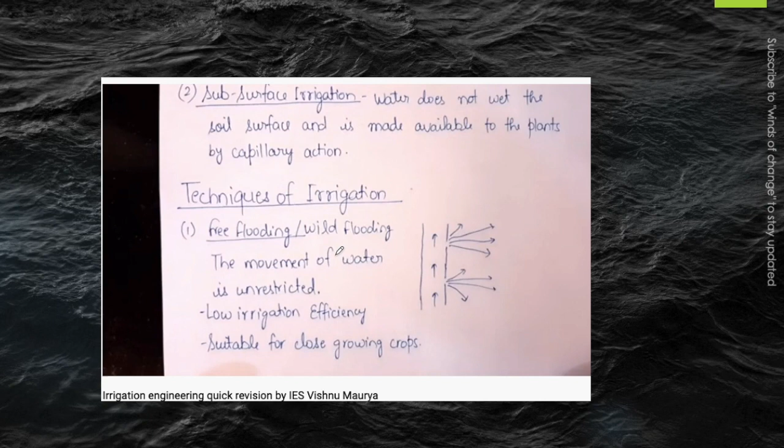We have explained the free flooding as wild flooding. The movement of water is unrestricted in this one, while in check flooding, water is controlled by surrounding the area with low and flat levees, and in furrow irrigation, only 20 to 50% of land surface is wetted by the water.

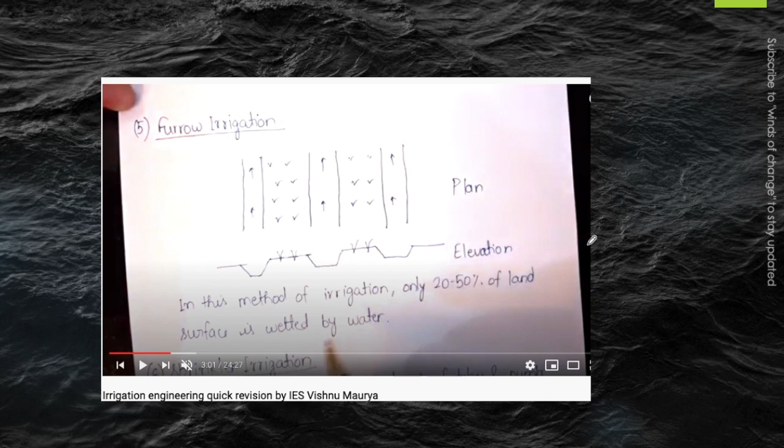Next question. Regime condition in a channel may occur if discharge is constant, channel flows uniformly in incoherent alluvium as that transported in suspension, or silt grade and silt charge are constant, or all of the above. Just think about the regime condition. Can you recall it?

Next question. Irrigation canals are generally aligned along ridge line, contour line, valley line, or straight line. What will be the answer here?

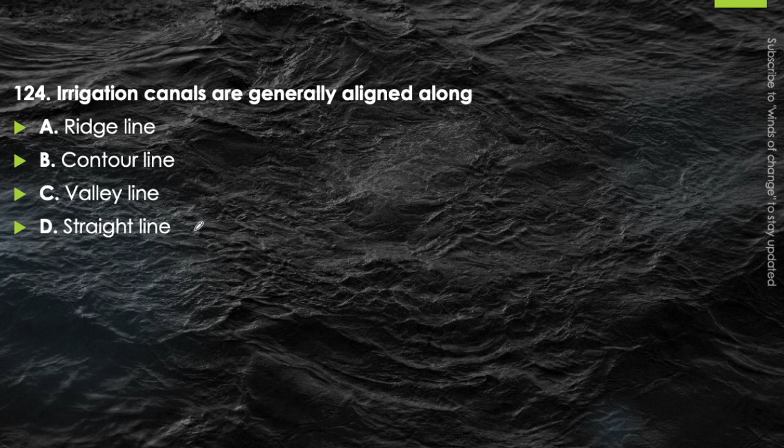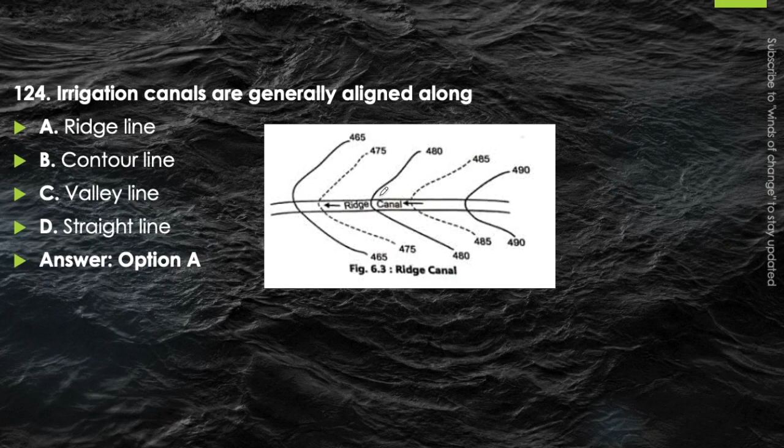Usually the irrigation canals are laid along the ridge line of that area, so that the water from this canal can be provided to the area of influence which are at the lower elevation in its surrounding. Okay.

Next question. Seepage through the foundation in an earthen dam is controlled by providing rock toe, horizontal blanket, impervious cutoff or chimney drain. Just think about it. Through the foundation in an earthen dam, if we have to control the seepage, then what we will provide? Obviously, it has to be an impervious layer which can only prevent the seepage of water. So answer will be option C, that is impervious cutoff has to be provided.

You can watch it here. These are the impervious cutoff. Cutoff trench is being provided below the earthen dam to prevent the seepage of the water.

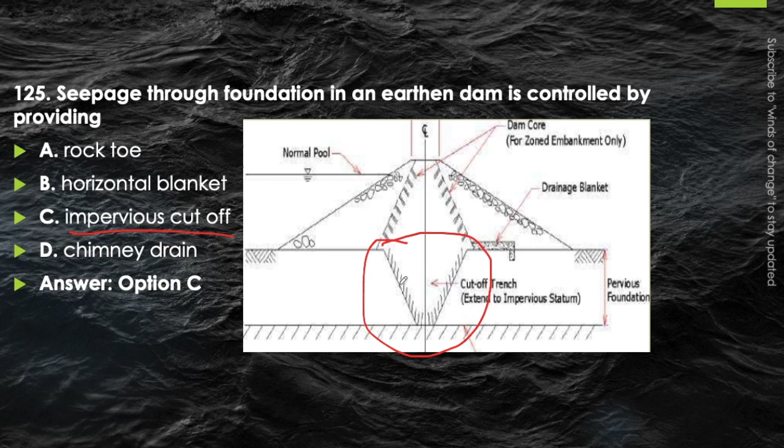Okay. Next question. If the straight side of a triangular section of a lined canal with circular bottom of radius d makes an angle 45 degree to the horizontal, the hydraulic mean depth is d, d by 2, d by 3 or d by 5. Just think about it. Can you recall the formula for this hydraulic mean depth, that is A by P, and formula for A and P in case of triangular section of canal? It will be option B, that is d by 2.

How it is so? Actually, it is irrigation canal having triangular side and circular bottom, and for such canal, area is given by d squared (theta plus cot theta), and perimeter, that is wetted perimeter, is given by 2d (theta plus cot theta). So A by P ratio, that is R, will become d by 2. So the answer will be option B, that is d by 2. Okay, we have to memorize this formula. This is also important for area and perimeter in case of the triangular lined section with circular bottom.

Next question. The water stored in the reservoir below the minimum pool level is called useful storage, dead storage, valley storage or surcharge storage. Just think about it. We have already discussed this question in the previous video of this 160 questions. Below the minimum pool level, that is called as dead storage. That is option B will be the correct answer.

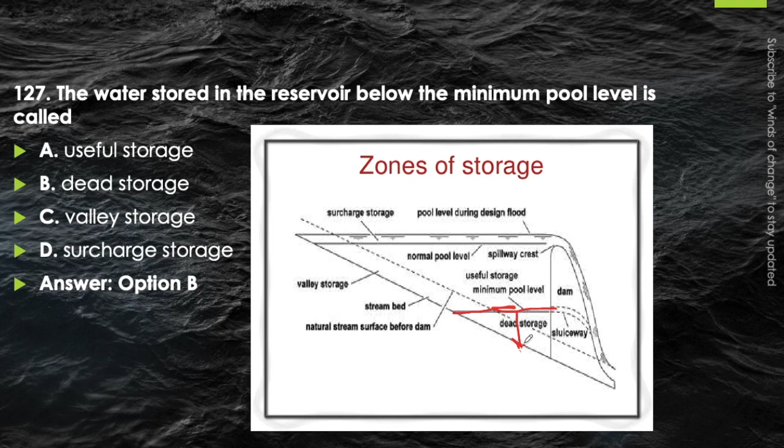Next question. The most suitable chemical which can be applied to the water surface for reducing evaporation is methyl alcohol, ethyl alcohol, cetyl alcohol or butyl alcohol. Just think about it. This is an important question. The answer will be option C, that is cetyl alcohol is the chemical that can be applied to the water surface to reduce the evaporation losses.

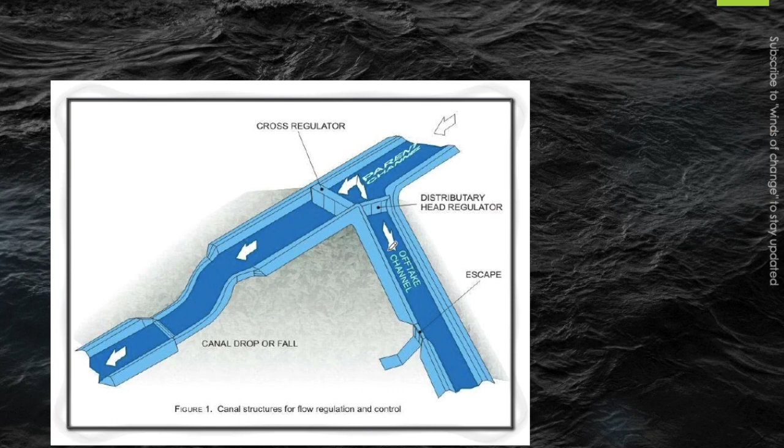Okay, so this is the statement which was written in the question, that is to increase the water head upstream when the main canal is running with low supplies. Okay, next question. If the reduced level of the canal bed level and highest flood level of the drainage are 212 meter and 210 meter respectively, then the cross drainage work will be aqueduct, superpassage, siphon, or siphon aqueduct.

Very easy question. You just have to know what are these things. As we already know, all of these are explained in the revision video of irrigation engineering, so you can watch there. And in this question we have to find out what will be the answer. Since RL of canal bed level is 212 meter and HFL of drainage is 210 meter, now canal bed level is above the HFL of the drainage.

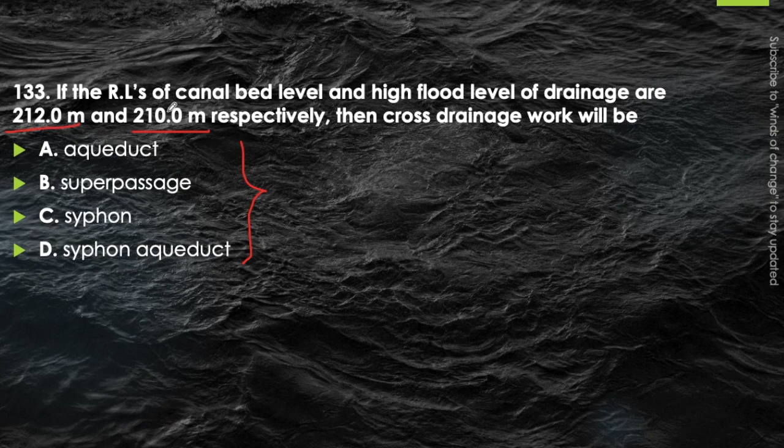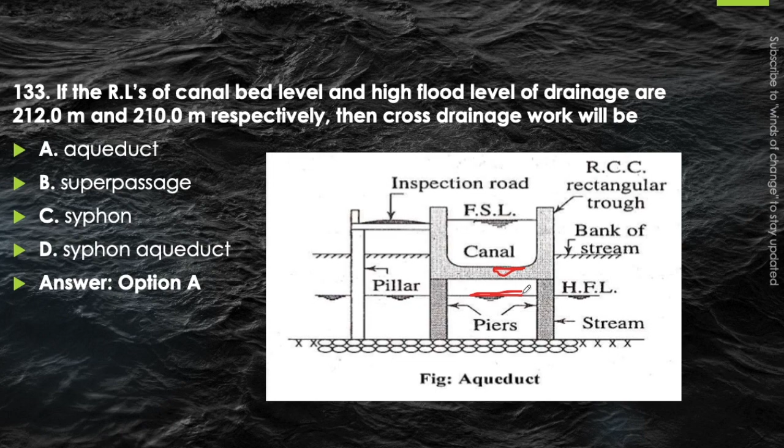So this is the case in which canal is above the drainage and HFL of the drainage is below the bed level of the canal. So what will be the condition here? It will be a condition of aqueduct. Okay, in which this is the canal bed level. So its level is 212 meter and the HFL of this drainage, that is 210 meter. Okay, so that is why it is aqueduct.

Next question. Effective precipitation for a crop may be defined as total precipitation minus loss due to evaporation, total precipitation minus loss due to infiltration, total precipitation during the crop period, or available water stored in soil within root zone of the crop. Just think about the answer.

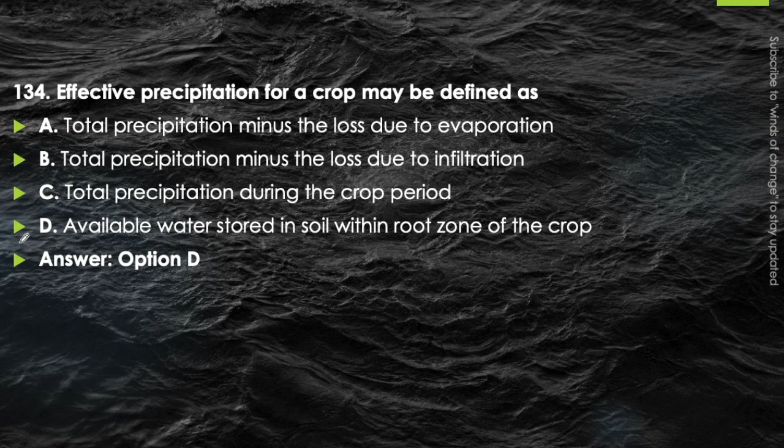It is the available water stored in soil within root zone of the crop, which will be the effective precipitation, because in the effective precipitation we minus all the losses that occur, and after that whatever precipitation is stored, that can be obtained by the root of the plant, that will be the effective precipitation, that will be the available water stored in soil within root zone of the crop.

Okay, next question. A deficit of the sediments in flowing water may cause a river meandering type, aggrading type, degrading type, or subcritical type. It is being said that deficit of sediment means it is being deprived of sediment in the flowing water. Then which one will be the answer? Just think about it. It will be a case of degrading type river, okay, in which the sediment load is decreasing. If the sediment is being deposited, then it will be called as aggrading type. Okay, so it is a degrading type river in which the deficit of sediment occurs.

Next question. The water utilizable by plants is available in soil mainly in the form of gravity water, capillary water, I think it should be hygroscopic water, or chemical water. Just think about it. Water utilizable by the plant is available in the soil in the form of capillary water. Okay, it will be available in the form of the capillary water.

Gravity water will seep down and join the water table. Hygroscopic water is the one which is available inside the soil particles, so that cannot be utilized by the plants. While the chemical water can also not be utilized by plant, it can be the capillary water only.

Which can be utilized by the plants. Okay, next question. Which of the following methods of applying water may be used on rolling land? Since we are having a rolling land, it is not a plain terrain, so which method will be applicable? Border flooding, check flooding, furrow flooding, or free flooding? Think about it. In this one, the answer will be free flooding.

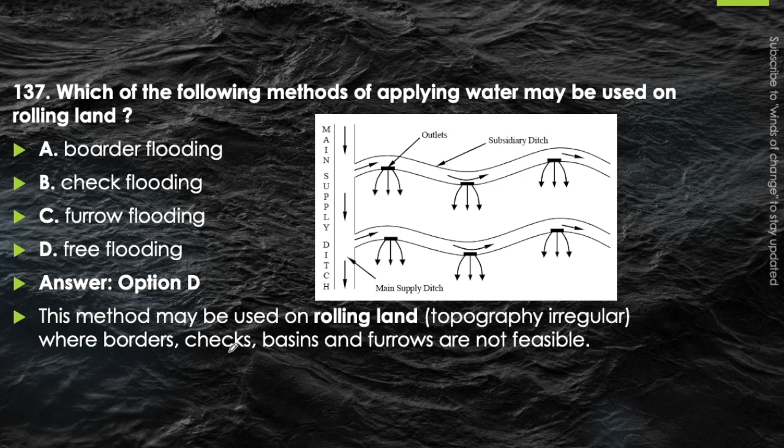Free flooding will be applicable on the rolling terrain. Since the elevation of different parts of the terrain is not defined, it is a rolling terrain, so obviously we will prefer free flooding only. We cannot go for any other type of flooding. We can also go for the sprinkler method, but it is not given in the options, so obviously the answer will be free flooding. This method may be used on rolling terrain when the topography is irregular, when borders, checks, basins and furrows are not feasible.

Okay. Next question. Infiltration rate is always more than infiltration capacity, less than infiltration capacity, equal to or less than infiltration capacity, or equal to or more than infiltration capacity. Just think about it. The maximum value of infiltration rate is called the infiltration capacity. So infiltration rate may reach the infiltration capacity when it is at its maximum value. So the answer will be option C, that is, infiltration rate will always be either equal to or less than the infiltration capacity, because infiltration capacity is the threshold, the maximum value of the infiltration rate.

Okay. Next question. Lacey's regime condition is obtained if silt grade in the channel is variable, discharge in the channel is variable, silt charge in the channel is variable, or channel flows in unlimited incoherent alluvium of the same character as that of the transported material. Just think about it. Very easy question.

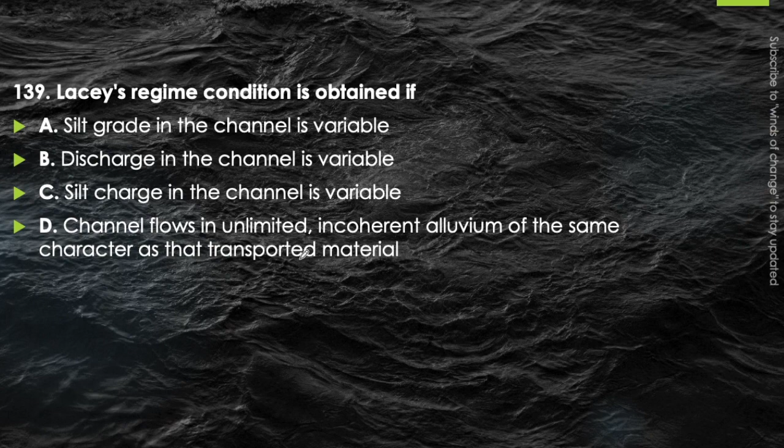The definition of Lacey's regime condition says that the characteristic of the particle when it was transported has to remain the same in the condition in which we are observing. So the answer will be option D, that is, the channel flows in unlimited incoherent alluvium. The silt in suspension should not change its properties. Incoherent alluvium of the same character as the transported material. Okay, so the answer will be option D. This is the definition of Lacey's regime condition. Okay.

Next question. Pick up the correct statement from the following. Water table generally follows the ground surface above it with a few exceptions. Or static level of the water in an open well indicates the position of the water table. Or at water table hydrostatic pressure is 0, or all of the above. Just think about it. Which one will be the correct statement? Let's see the first statement. Water table generally follows the ground surface above it with few exceptions.

This is usually true. Water table depth is usually constant in the area and it is parallel to the ground surface. The static level of water in an open well indicates the position of the water table, which is absolutely true, because if we are not taking out water from the well, there will not be any drawdown. So it will indicate the level of the water table. At water table, hydrostatic pressure is 0. This is also true, since there is no water above it. So obviously water pressure will be 0.

From that level, if we go deeper, there will be some hydrostatic pressure. But at the water table level, there will be no water pressure. Okay. So all of the above will be the correct answer. Option D will be correct.

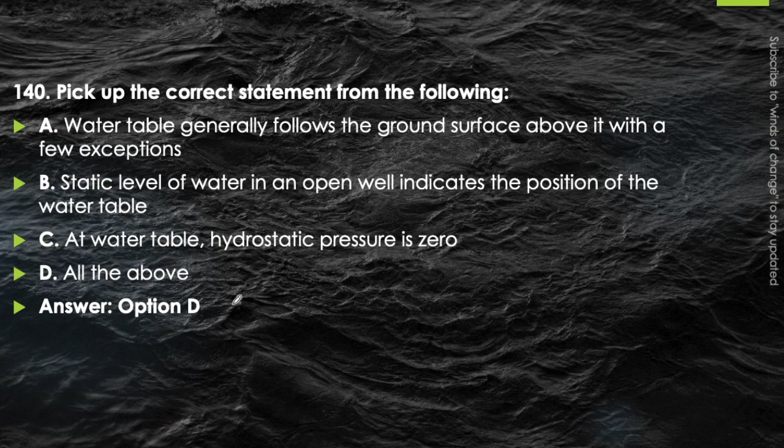Next question. Pick up the correct statement from the following. The full supply level of the canal should be above ground level. Is it true? Think about it. According to Lacey, regime condition requires a particular slope for a given discharge and silt factor. Just go to the formula of the slope given by Lacey and you will find the answer. In case the ground slope is less than the required bed slope, the silt factor must be reduced by permitting the entry of coarse silt. Or all of the above. Just think about it.

Okay, let's take each statement. First statement, the full supply level of canal should be above ground level, which is absolutely correct. We have already discussed in a question that the full supply level of canal should be about 15 to 20 centimeters above ground level, so that water can be easily transported to the fields around it. According to Lacey, regime condition requires a particular slope for a given discharge and silt factor. This is also a correct statement.

Can you recall the formula of slope given by Lacey? It will be given by S equal to f raised to power 5/3, that is silt factor raised to power 5/3, upon 3340 Q raised to power 1/6. This is the equation of Lacey's slope.

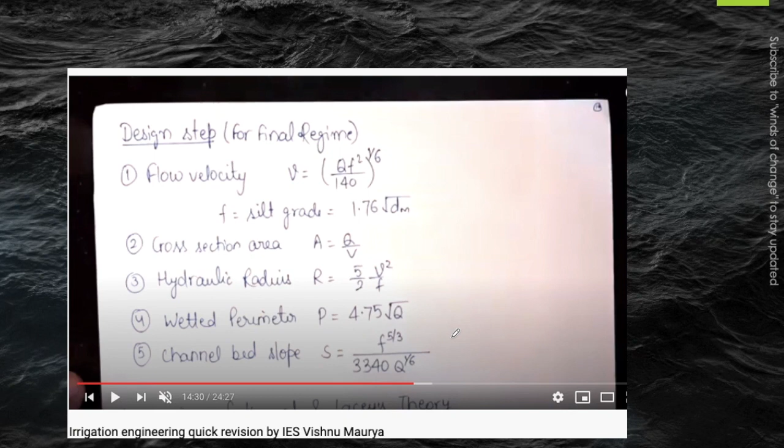So here Lacey's condition will require a particular slope for a given discharge and silt factor. Now the third statement: in case the ground slope is less than the required bed slope, the silt factor must be reduced by permitting the entry of coarse silt. We will provide the coarse silt so that the transportation can be easier. There should not be more deposition of the silt at the bottom. Okay, so all of the above will be the correct answer. That is, option D will be correct.

Next question. For standing crops of undulating sandy field, the best method of irrigation is sprinkler irrigation, free flooding, check method or furrow method. In case of the sandy field, the water that is supplied should not be inundated because it will obviously reach the bottom. It will be infiltrated and it can join the water table easily. So in the sandy field, we will prefer that kind of irrigation which requires a minimum amount of water and can be supplied externally to the crops in the root zone.

So here we will prefer the sprinkler irrigation method, since there will be less losses because of infiltration in the case of sprinkler irrigation. That is why we will prefer sprinkler irrigation in case of the sandy field, even in the case of an undulating sandy field. In the undulating field, we will prefer sprinkler irrigation.

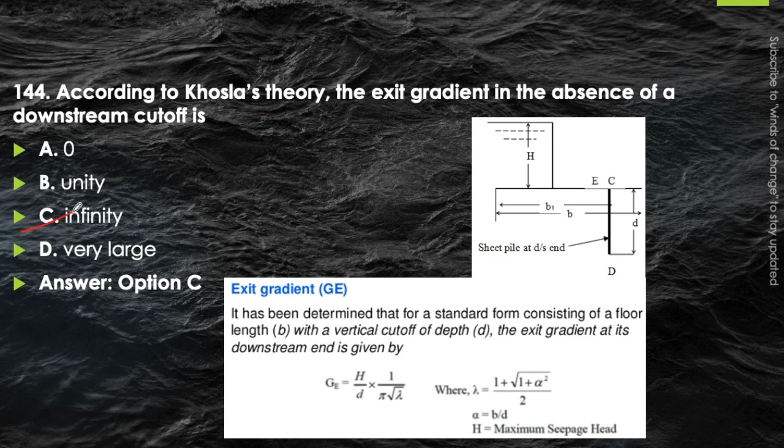This is the formula for exit gradient, that is H upon d times 1 upon pi root lambda. So d, the downstream cutoff depth, will be 0, so obviously it will be infinity, because something upon 0 becomes infinity.

Next question. The ratio of rate of change of discharge of an outlet and parent channel is known as efficiency, sensitivity, flexibility or modular limit. Just think about it. What will be the answer here? It will be called flexibility. The ratio of rate of change of discharge of an outlet and parent channel, Q outlet upon Q parent, will be called flexibility. Option C will be the correct answer.

Memorize it. Next question. Infiltration capacity is a constant factor, changes with time, changes with location or changes with both time and location.

Infiltration capacity. Think about it. It is the maximum rate of infiltration that can be achieved. It will be changing with both time and location. It will depend upon type of the soil, topography of the area as well as on the time also. Okay, so option D will be the correct answer.

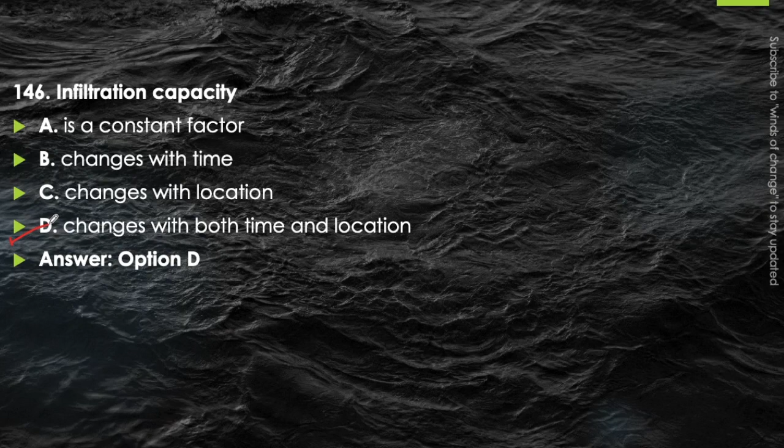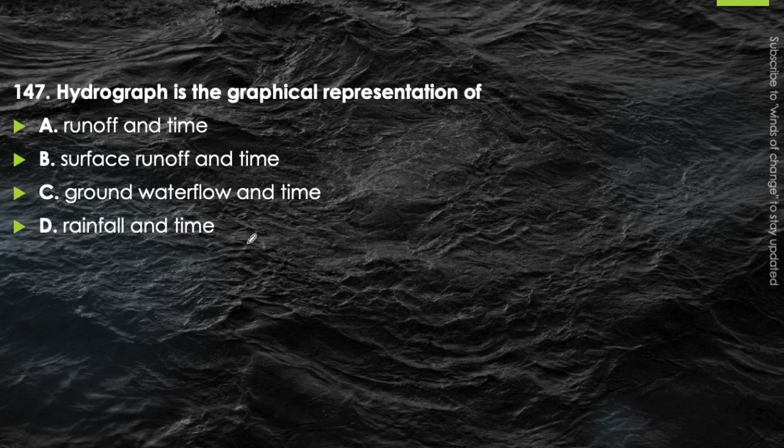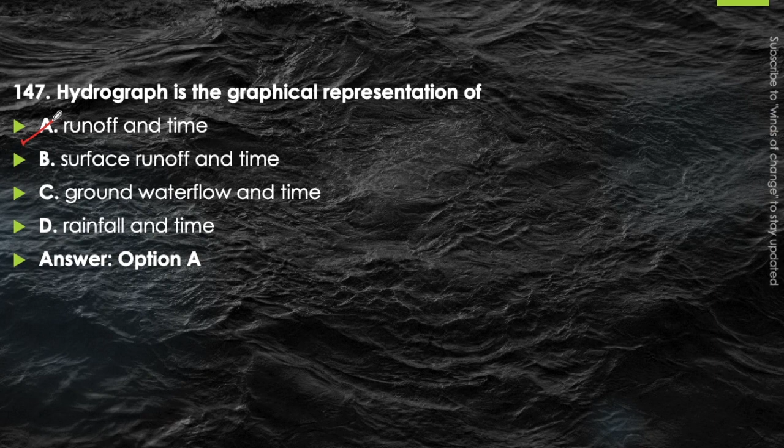Next question. Hydrograph is a graphical representation of runoff and time, surface runoff and time, groundwater flow and time, or rainfall and time. Just think about it. Hydrograph is a graphical representation of... Very easy question. It is a representation of runoff versus time. Okay, that is the rainfall excess or runoff and time, which will be called as a typical hydrograph.

Okay, next question. In a canal siphon, the flow is under atmospheric pressure, pipe flow, with critical velocity, or under negative pressure. In case of the canal siphon, what is canal siphon? In this, the canal is taken under a closed condition. Usually the canal flows at the atmospheric pressure as an open channel, but in the canal siphon, it will pass through a contained portion, through a closed portion.

So the flow type will be pipe flow. That is, option B will be the correct answer. Pipe flow will be the case of the canal siphon. Okay, in this we will provide canal through a closed space.

Next question. Pick up the correct statement from the following. In a level crossing, the crest with its top at the canal full supply level is provided across the drainage at its upstream junction with canal. Have you understood? Second, in case of level crossing, a regulator is provided across the drainage at its downstream, while in level crossing, a cross regulator is provided on the canal below the crossing, or all of the above.

Just think about it. In case of level crossing, these all statements will become correct because at the level crossing, first of all, crest with its top at the canal FSL is provided across the drainage at its upstream junction with canal. In the level crossing, a regulator is provided across the drainage at downstream, as well as a cross regulator is also provided on the canal below the crossing. Okay, so all of the above statements are correct and we should memorize these.

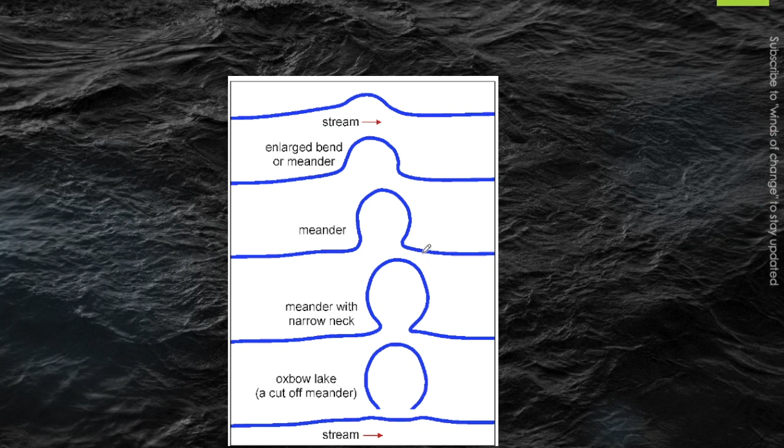You can watch it here. This is a stream. Let's say it is flowing and there is a meander created by some natural factors, and this meander will enlarge, and if we provide a cutoff here, then obviously it will decrease the stream length, while in case of the meander the stream length was increased. Okay, so obviously meander will increase the stream length and cutoff will decrease the stream length.

Okay, next question. Useful storage minus valley storage, useful storage plus surcharge storage, useful storage plus surcharge storage plus valley storage, or useful storage plus surcharge storage minus valley storage. What will be the correct answer here? For a flood control reservoir, effective storage will be the sum of useful storage and surcharge storage, but we will subtract the valley storage from it. So it will be useful storage plus surcharge storage minus valley storage.

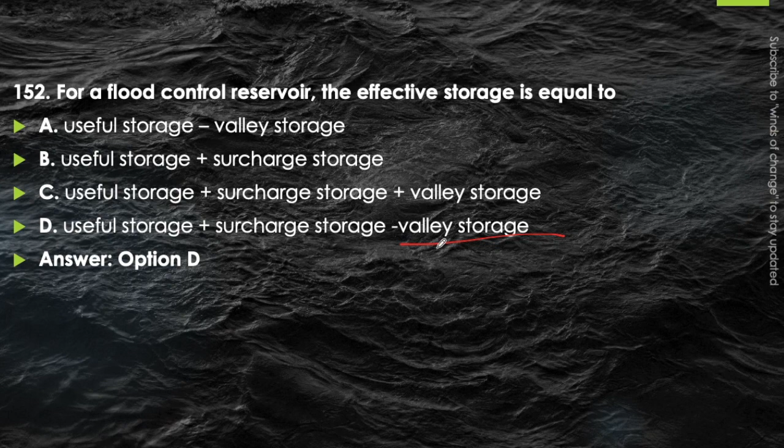Okay, next question. Silt excluders are constructed on the riverbed upstream of head regulator, riverbed downstream of head regulator, canal bed upstream of head regulator, or canal bed downstream of head regulator. Think about it, where we provide the silt excluders.

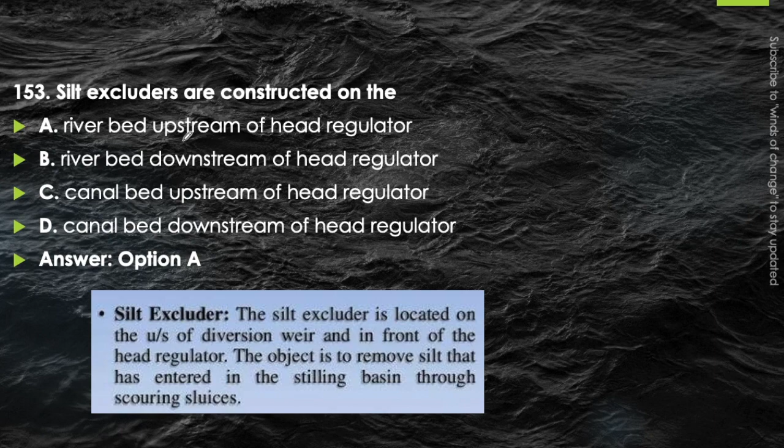We provide it along the riverbed upstream of the head regulator. These silt excluders are located on the upstream of the diversion weir and in front of the head regulator. The object is to remove silt that has entered in the stilling basin through the scouring sluices. We exclude the silt that is being deposited at the riverbed upstream of the head regulator.

Okay. Next question. The sinuosity of a meander is the ratio of meander length and the width of meander belt, meander length and half width of river, curved length and the straight distance, or none of these. Think about it. Easy question. If you know about the sinuosity, you can easily answer the question. The sinuosity will be the ratio of curved length and its straight distance. That is, option C will be correct. It is the ratio of curved length and the straight distance.

Okay. Next question. If the straight side of a triangular section of a lined canal with circular bottom of radius r makes angle theta with horizontal, the perimeter of canal is r(theta plus tan theta), 2r(theta plus tan theta), r(theta plus cot theta), or 2r(theta plus cot theta). Think about it. Can you recall it? The answer will be option D, that is 2r(theta plus cot theta). This will be the perimeter. Perimeter, that is this one. This perimeter is 2r(theta plus cot theta).

Okay. Next question. An aggrading river is a silting river, scouring river, both silting and scouring river, or neither silting nor scouring river. Just think about it. We have already discussed it in a question in which we discussed degrading and aggrading rivers. An aggrading river is the one in which silting occurs. That is, a silting river is called an aggrading river.

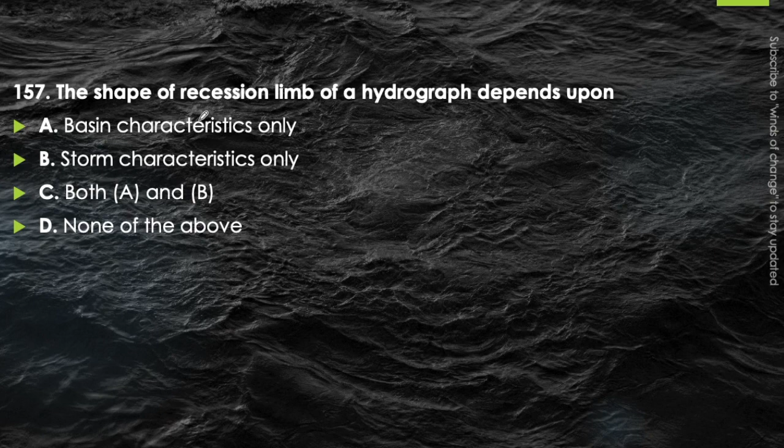Okay. Next question. The shape of the recession limb of a hydrograph depends upon basin characters only, storm characters only, both A and B, or none of the above. Think about it. We are talking about the recession limb of the hydrograph. The recession limb will depend upon the basin characters. This is the recession limb. This will depend upon the basin character because peak flow has already been reached, and after that there will be the recession limb, which will depend upon the basin characters only.

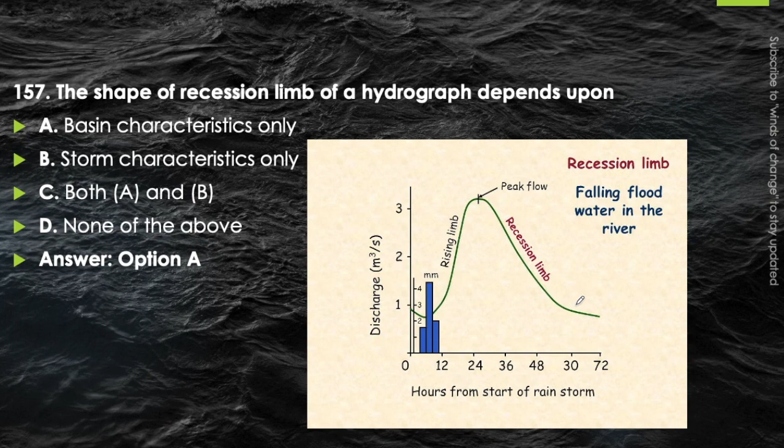Okay. Next question. Which of the following is a non-recording rain gauge? Tipping bucket type rain gauge, Symons rain gauge, Stevens weighing type rain gauge, or floating type rain gauge? This is a very important question. We have discussed this in a video of revision of hydrology.

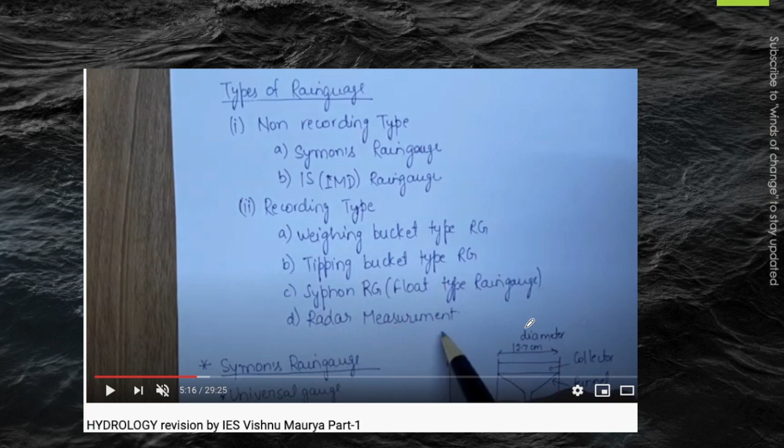So here we finish with the 160th question, that is the last question of 160 questions of irrigation and hydrology.